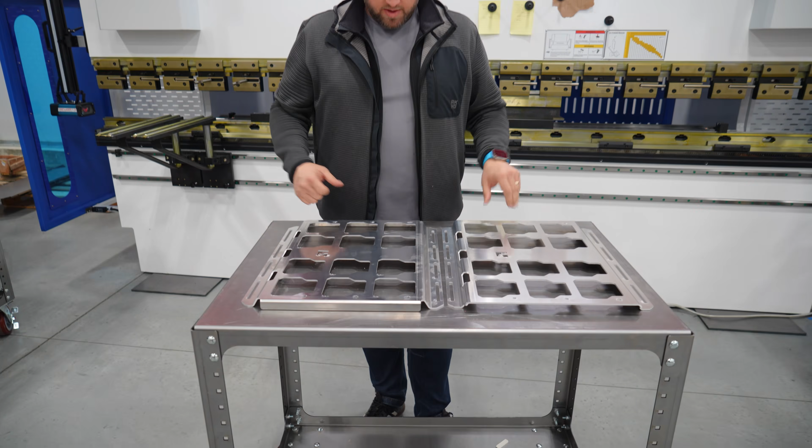It's really hard to move in this direction, despite a little bit of added complexity.

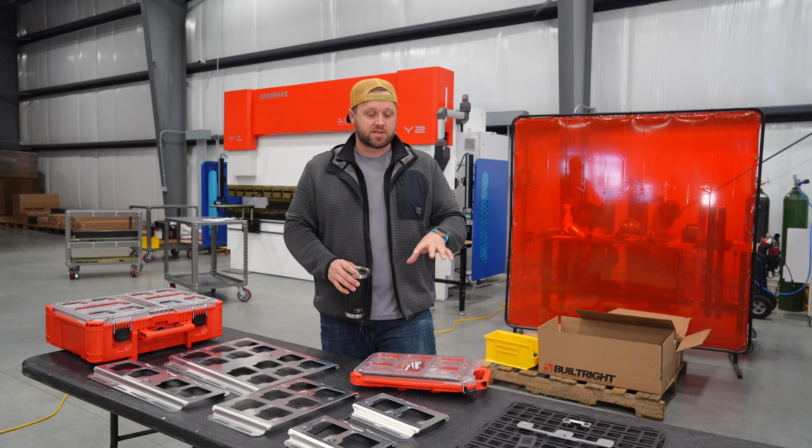If you're familiar with what we offer right now, it's basically a really low profile pair of brackets and a latch. You could use 2 of them for a smaller Packout or 4 of them for a large one. The idea here for us was to make it as low profile as possible.

So you can see right now I don't have a Packout in here, and there's not a big bulky bracket on it, which was totally the point. Still a really, really great option if this is your use case.

We are running into people that call or email looking for one of 2 things. They're looking to just mount something like this to the wall of their trailer or their shop or whatever, and in that case, a more full bracket would be more useful. We also end up with people doing weird creative stuff with the MOLLE panels, whether it's seat back panels or in the bed, which is awesome, but they're looking to mount a Packout there, which is really hard to do with this current bracket setup.

Which is kind of leading us to explore what you see here, and I'll get more into this now, but if you have a full one-piece Packout bracket, you can sort of hang it off the side and still support the whole Packout. So that's what led me to experiment with this.

This is 2 different sizes, full width for a full-size Packout, half for a smaller Packout. These are full height, I'll call them.

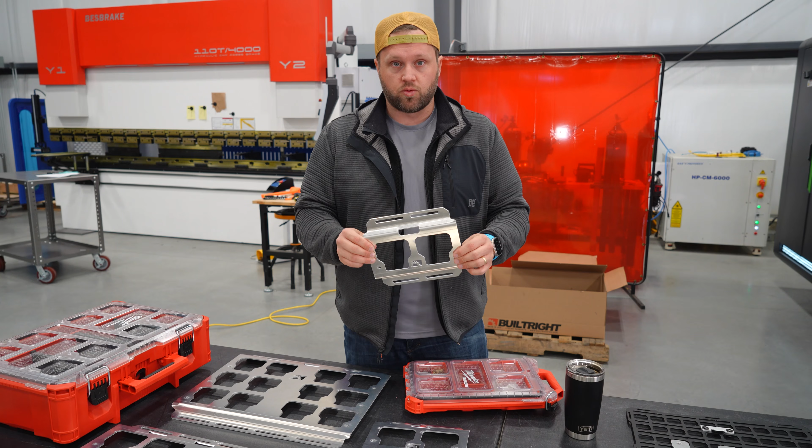But the other option too, and this is something that I kind of like the idea of, it's similar to what we did with the Cybertruck Packout panels, is just a single row. So this is perfect, especially when you don't need a bunch of dynamic stability, and it's going to be stationary. Just to have a single cleat for your Packout.

So if you're hanging these on the wall of the shop, trailer, whatever, this is going to be more than enough. It's smaller, it's lower profile. Anyway, this is what I have right now. You can see I've got a flange on the top and the bottom for mounting.

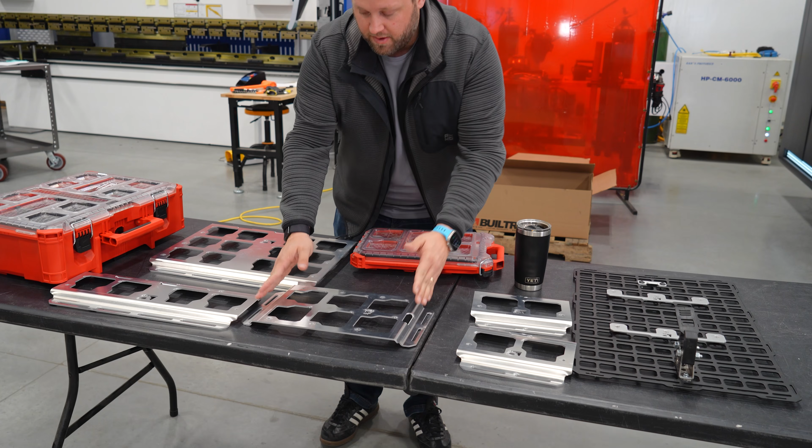If I were to put this here right now and push on it, that bracket's going to flex a little bit because these feet are splaying. Once these are bolted down, it's going to be much, much less noticeable. On the large bracket, it's already less noticeable because I left so much material in the middle here.

So this is where we're at right now. The last thing I want to experiment with before we send these to production is on these full height brackets, experimenting with a flange down the side, which is going to add some rigidity. So I'm in the process right now. I just designed one. I'm going to go cut it on the laser, and we'll bend it up, and we'll maybe do a side-by-side test.

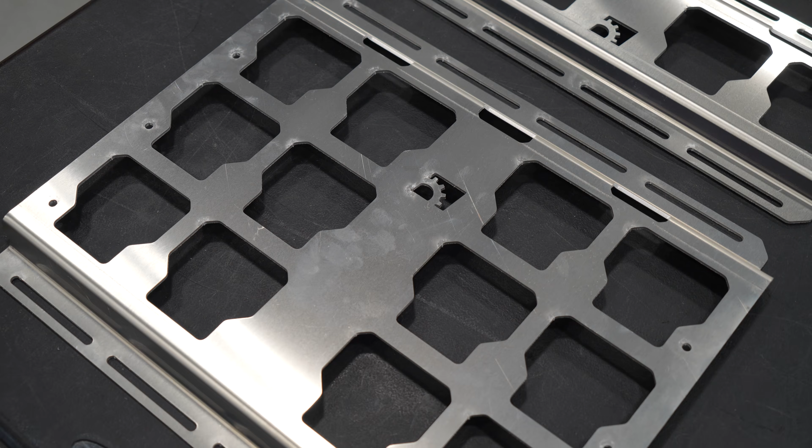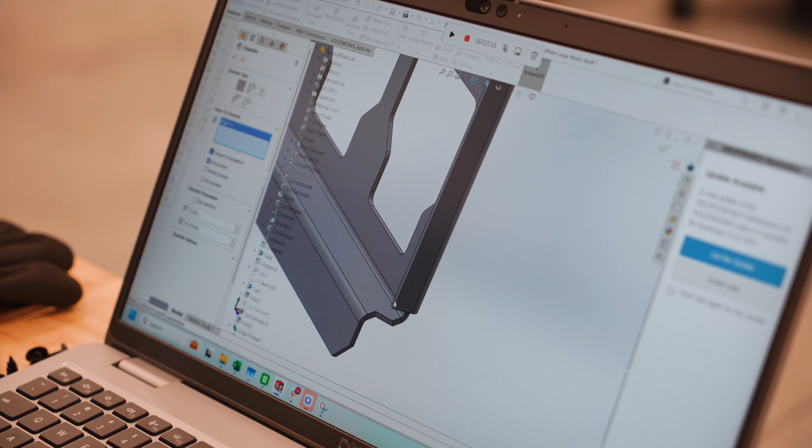All right, so we have those early prototypes that don't have a flange on the edge. They're pretty sturdy, especially the larger panel, which is the one that I'm modifying right now. I think the reason for that is that I left a lot of material in the center of the panel, so it's not prone to bowing.

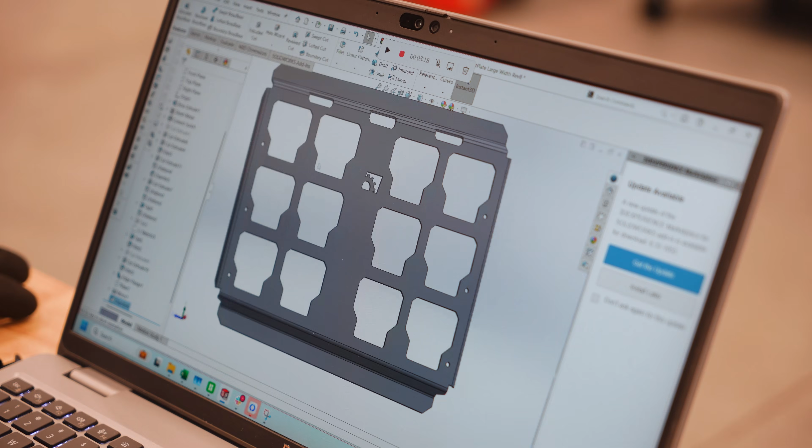That being said, once the 2 ends of the panel are secured to whatever this mounting surface is, I don't anticipate they bow at all. But I'm gonna prototype one. This is not done, but I'm going to prototype one that's got these edge bends here. That's going to make it really, really rigid.

I did a panel like that yesterday for another project, so I kind of want to experiment with that. If it doesn't add anything to the product or the project, I'm not going to do it. But if it does, it'll be useful to know.

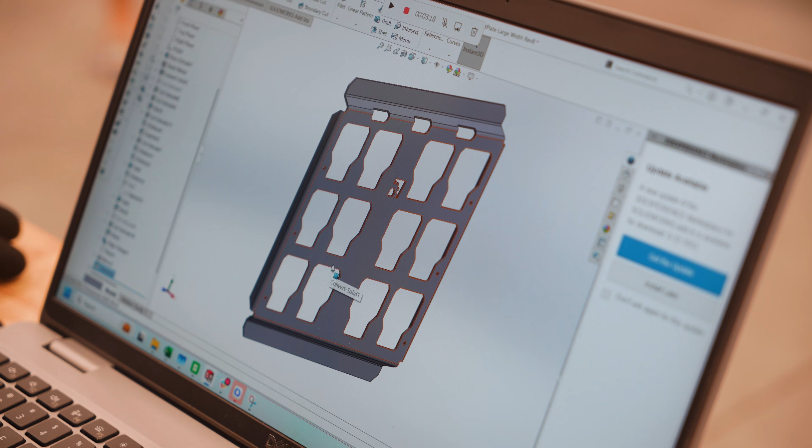One of the things that I don't like about this is it just starts to enclose the space behind the panel. So if this is being used outdoors or in a trailer or something and there's debris or sticks or leaves or whatever, it's prone to getting caught back there. I have the same concern with MOLLE panels, which is the reason I designed them the way that I do.

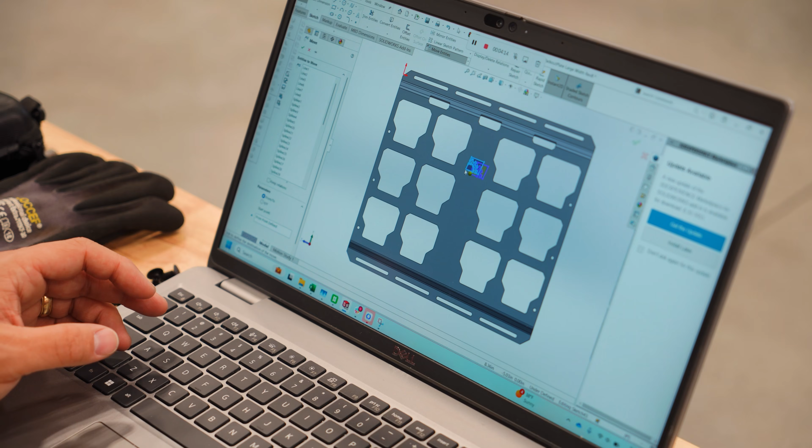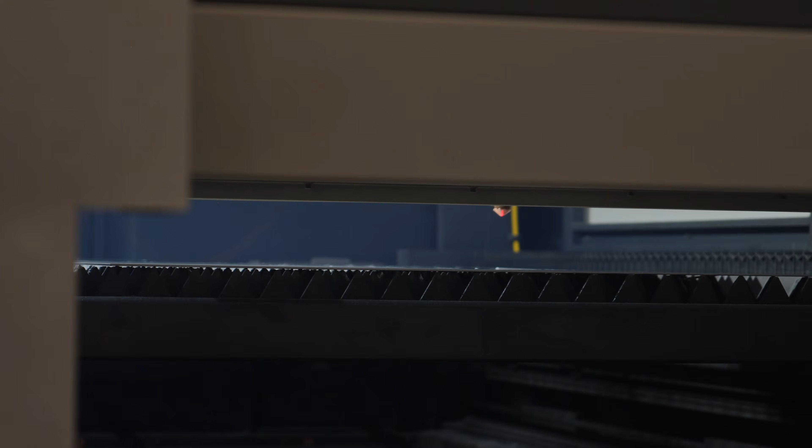All right, so we've got this revision finished up. I'm gonna cut one on the laser and bend it up. Good, I'm going to clean them up and then we'll bend them.

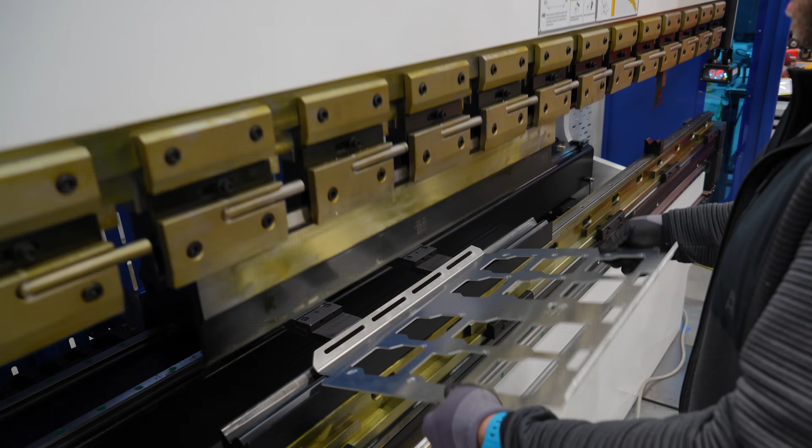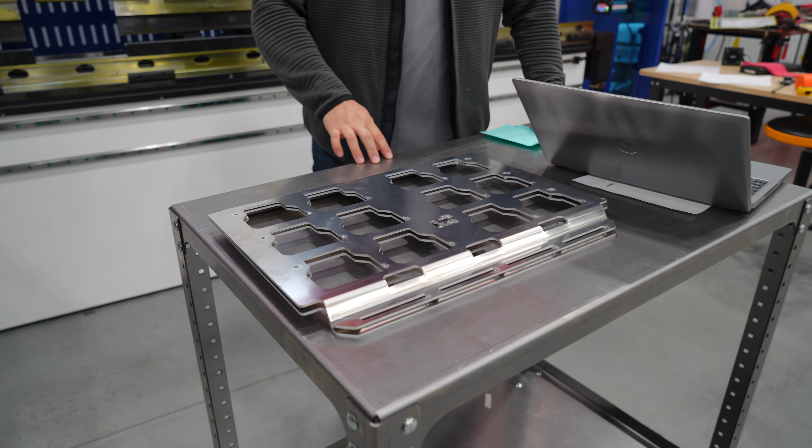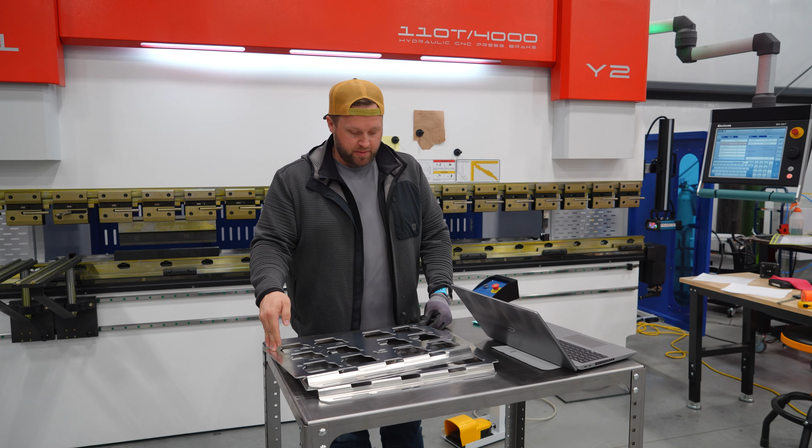Those bends are great, but I had bent those before on previous prototypes. Now I've got to figure out this end bend, which is going to be a 90 down, but I got to make sure the rest of the part doesn't run into the machine. So I'm going to figure out the programming first, then pick the tooling, then bend it.

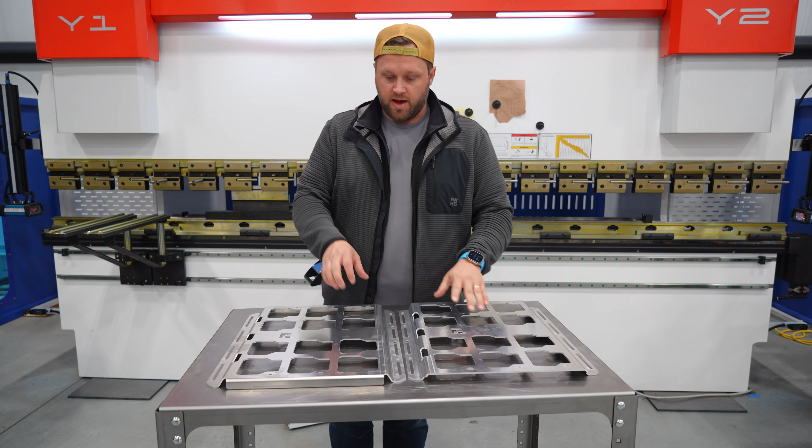So we have our two prototypes here. They both have about the same footprint because I shrunk this a little bit to accommodate this bend. This is the one that I bent before - you can see a little bit of bowing. It's really not bad, this is gonna work fine. But this is our experiment now, and this really feels rigid and solid. It's really hard to move in this direction, despite a little bit of added complexity.

I'm also going to show one other thing that's going to make these unique. One of the features we added solves a problem I've had with other sheet metal Packout panels. This happens to be thicker - it's 1/8 inch aluminum, so it's less of an issue here. But on thinner gauge panels, which is what a lot of them are, your Packout, because it's designed to interface with those Milwaukee plates or another Packout which is thicker material, they kind of rattle around a little bit. Not a huge deal, but it's a little bit of an annoyance. It doesn't feel quite as refined as plastic on plastic does.

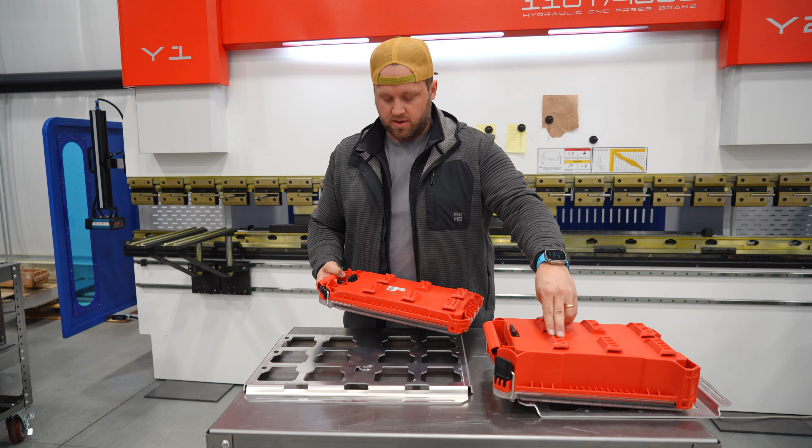So what we did here is cut 6 different holes and put in a small push rivet. We'll try and show you a close-up, but this is a push rivet that we include with some of our other products. The reason is the bottom of this Packout is slightly different than the bottom of this one - I think it's probably just a manufacturing tolerance thing. But if I put this Packout in here, it can rattle around a little bit.

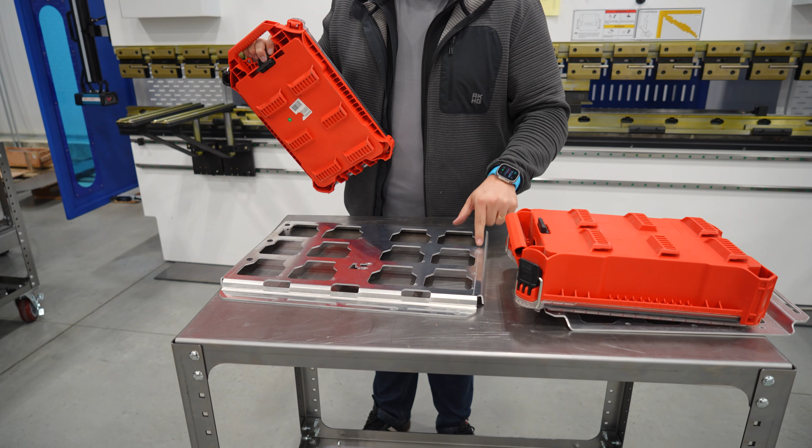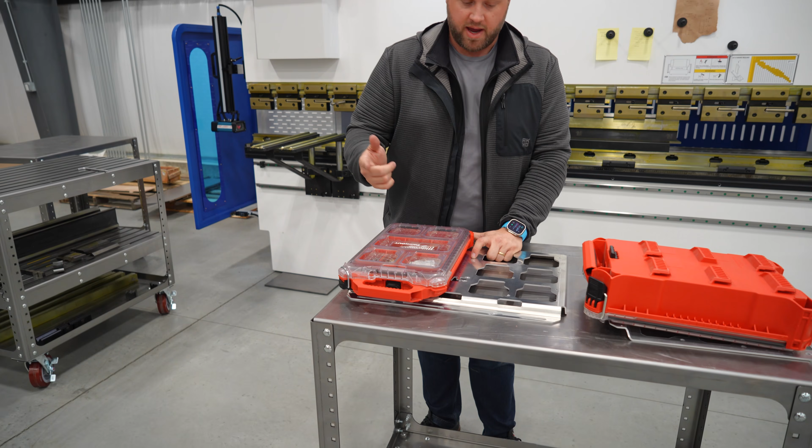And I don't have those push rivets in here. On this side, I've got the push rivets in, and that Packout's gonna go snug on there, nice and snug. That interface is like plastic on plastic, which feels really nice. The reason I'm qualifying that is as I was experimenting with this deeper Packout, I put that in here on this side, and it's actually a nice snug fit. On this other side where I've got the push rivets, I can't really comfortably get it on there, which is interesting. There you go.

So what we're gonna do is include those push rivets as an optional accessory, and then depending on your preference or your Packout organizer, you could choose to use them or not. They're really easy to put in and out. I think it makes sense, given the variation I'm seeing between these two, to include them no matter what. And then it's just up to the user.

So other than that, I'm pretty happy with this. The only other decision to make is, do we powder coat them or sell them raw? I'm actually leaning towards selling them as raw aluminum like this, leaving it to the user to do whatever they want with it. But powder coating, if you're really using these, is going to probably fail just because of the interface and the constant motion.

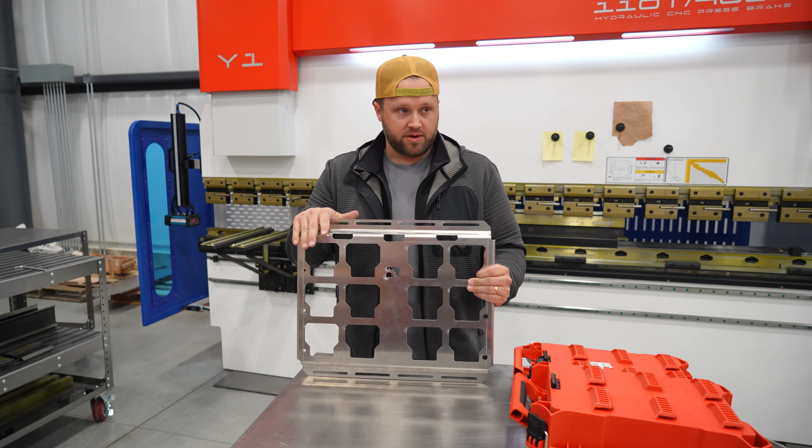So that is the current state of this project. I'm really happy with how this turned out. I'm gonna make the same revision to the narrower mount. And then again, we do have that line of mounts that's just gonna be the one row - it's a short enough span that this wouldn't be very helpful, so I think we'll probably leave it out there. So that's gonna be 4 new products.